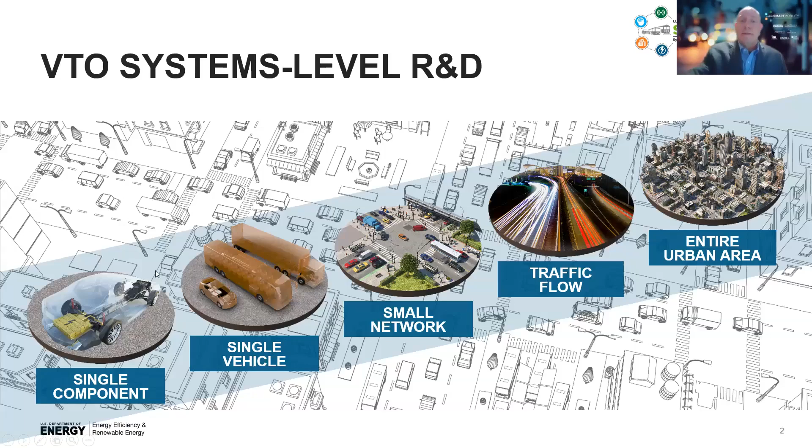As I've said before, because the opportunity space for transportation is so large and complex, we've taken a multidisciplinary consortium approach to mobility. We convened 5 of our leading national labs doing mobility research to build a multi-year, multi-laboratory collaborative dedicated to further understanding the energy implications and opportunities of advanced mobility solutions.

And we call this the Smart Mobility National Lab Consortium. This is really a key research effort of the EEMS program and is focused on understanding the system-level impacts that emerging transportation technologies and services will have on mobility, and on identifying solutions that improve mobility energy productivity.

The consortium was designed to consider transportation holistically, that is, as a system, a highly interactive, highly dependent, very complex system of systems. We did research to understand each of these systems individually, but more importantly, we worked to understand how they fit together, how they interact, and how they affect one another.

Connectivity refers to communication, an exchange of information between vehicles, that is V to V, or between vehicles and infrastructure, that is V to I. Connectivity can apply to both human-driven vehicles and automated vehicles.

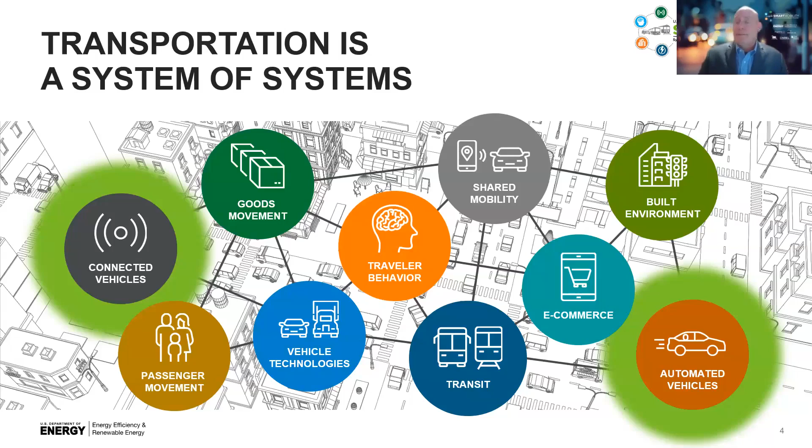CAVs are one of the primary technology levers that EEMS and Smart Mobility considers when looking at the future of transportation. And while nearly every new vehicle model sold in North America today currently has automated features as either standard or optional equipment, think adaptive cruise control or lane centering or automatic braking, we don't yet have fully automated vehicles ubiquitously driving everywhere on our streets.

So as new automated driving features are introduced, we have to understand how they operate, not only how they impact the vehicles equipped with them, but also how they affect the surrounding traffic. And that's what our CAVs research pillar set out to do, and what Eric will describe in just a moment.

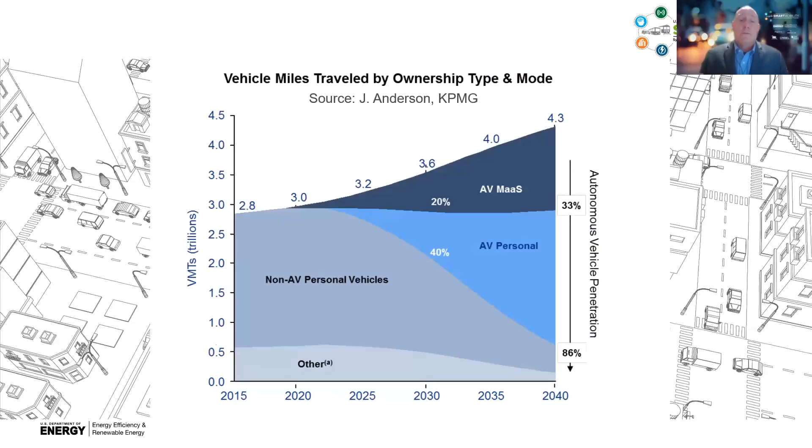This analysis of existing research at the time concluded that, in the worst case, we could see a 200% increase—that's a tripling of energy consumption from connected and automated vehicles. So that's the upper bound, estimated by looking at potential impacts in both the travel demand side and the vehicle energy efficiency side. The increase here is primarily driven by induced travel, that's an increase in VMT due to the ease and convenience of fully automated travel.

On the other hand, this analysis showed that if we use connectivity and automation to improve the efficiency of our transportation system, we could realize up to a 60% reduction in transportation energy, again, driven by both changes in efficiency and travel demand. The primary drivers here were shown to be opportunities to right-size vehicles and smooth drive cycles and operate more efficiently. So what this research told us was that there's a lot of uncertainty, and we saw a big gap in understanding the energy impact of CAVs.

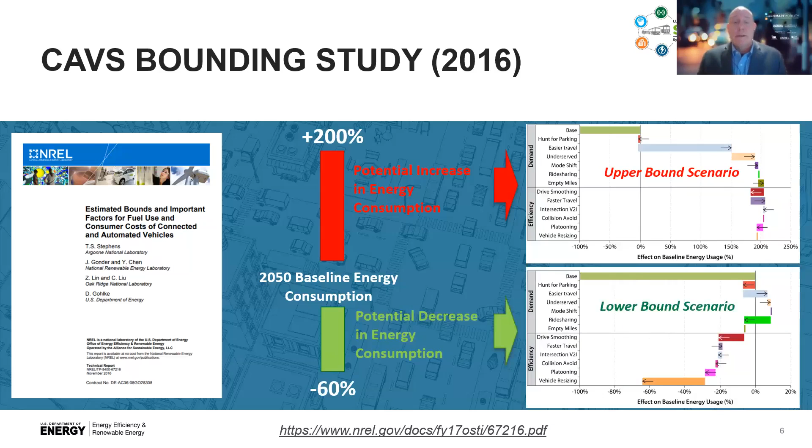So the answer to what are the energy impacts of CAV technologies came out to be, it depends. To elaborate on that, the impacts of connectivity and automation depend on a lot of things.

Levels of automation. So most of you are probably aware of the SAE automation levels, 0 through 5. The impact of any technology across the spectrum varies depending on what it is, how it's implemented, and how it's used. Types of connectivity. You can achieve very different results in terms of traffic flow and energy consumption depending on the information that is communicated to or by the vehicle.

Classes of vehicle. A particular automated feature can result in different energy impacts if it's on a compact car versus a full-size SUV or even a medium or heavy-duty truck. Similarly, whether the vehicle is powered by an internal combustion engine or a battery and electric machine or a combination of the two in a hybrid powertrain will determine the energy impact of the CAV technology.

What's the controls objective? Is the feature focused on safety, or driver comfort and convenience? Is it traffic flow, or is it fuel efficiency? Sometimes these objectives are in opposition to one another, but often they're synergistic.

Technology adoption. The impacts of 10% penetration of a particular CAV technology can be very different than if half the cars on the road are equipped with it, and the relationship is not always linear.

So now that I've teed up a lot of difficult questions, I'll turn it over to Eric Rask, who led the Smart Mobility CAVS research pillar at Argonne National Lab, to try and provide some answers. Eric will give some highlights of our CAV-focused research, explaining some of our findings and results. I believe we've made a lot of progress in this area over the past few years, but there's still a lot of work to do, not only by DOE, but by the entire research community. Once Eric is done, we'll have a few minutes for Q&A, and I encourage you to type your questions in the Q&A box, not the chat box, and we'll go through as many as time allows. So now I will turn it over to Eric Rask.

Hi everyone, thanks to David for introducing our topics. I'm looking forward to giving an overview of some of the highlighted research areas as well as the thinking behind what we did, building within the SMART Consortium as we're moving forward. Looking forward to the discussion.

Starting at the highest level, what kind of research questions are we thinking about? As David mentioned, we're really trying to understand energy, technology, and usage implications out of connectivity and automation, and also trying to think of efficient connectivity and automation-enabled solutions. The first part relates to VTO's technology portfolio and how we identify synergies, both positive and negative, with connectivity and automation relative to electric machines, batteries, and other technologies we're interested in. The second part is how we identify areas where connectivity and automation can be harnessed as an opportunity and enabler for improved energy efficiency, better traffic flow, less congestion, and other items VTO technologies are considering.

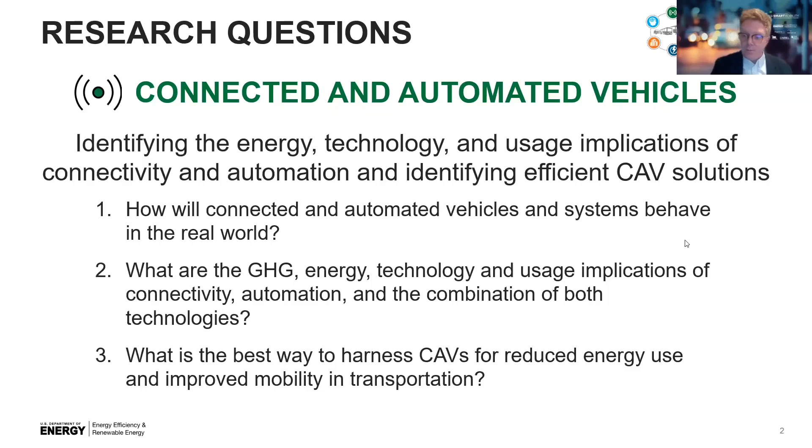Beginning with those three foundational research questions, we break that into research focus areas. The first is prototype development, experimentation, and large-scale data analysis. Thinking about our initial research question, how do these systems work in the real world, it's truly experimental prototyping and partnering with large data sets to understand how these vehicles are operating.

Moving into the second research focus area, we're interested in how we evolve and validate, particularly using data from focus area one, our connected and automated vehicle modeling portfolio. This is integrated within the Smart Mobility Modeling workflow presentations, and ultimately it's part of the larger effort of working from the vehicle level all the way to the system level.

Our third research question is understanding the impacts of connected and automated vehicles within the near-term transportation system—specifically what happens when different penetration levels of these vehicles show up on existing roadways and transportation systems, with some degree of vehicle-to-vehicle or vehicle-to-infrastructure communication, but not necessarily harnessing all the capabilities afforded to us. Building on that theme, the fourth question is CAV-enabled opportunities for reduced consumption and congestion, understanding what's possible from the range of these different technologies.

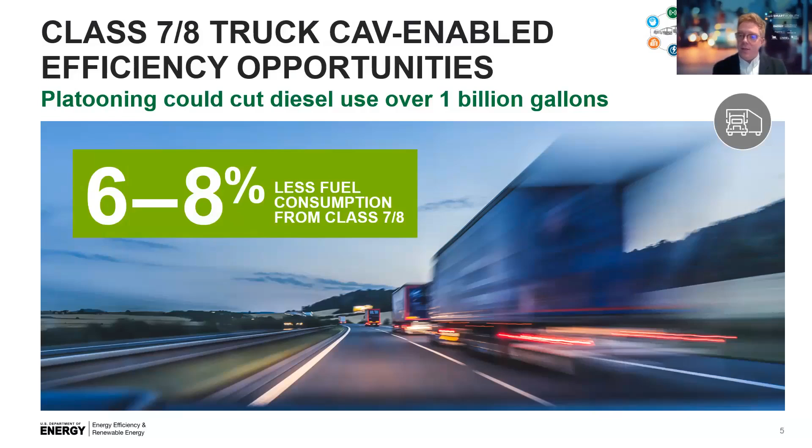Once we start thinking about how we get to those benefits, we break that into two separate pieces: one is the efficiency benefits available because of truck platooning, and the second is the opportunity to actually engage and observe those benefits through the availability of platooning. Stepping in one layer, the first part is a comprehensive study from the Department of Energy. These are some pictures from actual testing.

We did a lot of very detailed experimental work looking at different truck platoon configurations, different following distances, and that's how we get the first piece of this number in terms of 7 to 13% savings, depending on how many trucks are in the platoon, what the configuration is, and what type of speed they're operating at.

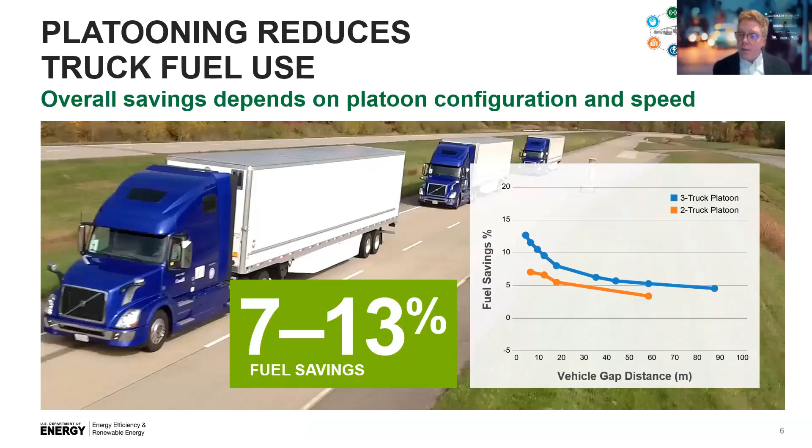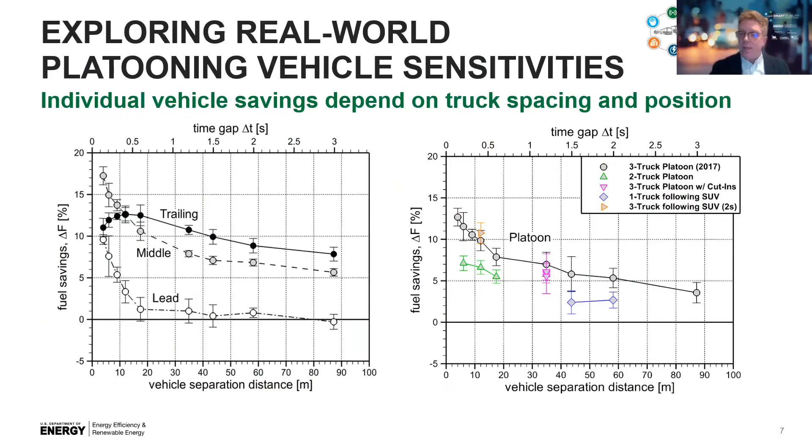While I'm not going to talk much about that here, a lot of really interesting aerodynamic work was done, both in terms of instrumentation and data analysis, to understand these interesting and not necessarily expected trends for the trailing vehicle reduction as it gets closer to the other vehicles. The figure on the right highlights the comprehensive nature of this analysis. Not only did we look at 2 and 3 truck platoons, we looked at platoons that may or may not be following an SUV, and vehicles cutting in and out of the platoon. So really trying to understand not only the pure benefits of platooning operation, but also the real-world sensitivities and operating conditions that may impact the overall benefit.

Again, we talked about the benefits of platooning, and now we're talking about the opportunities for platooning. This was really a set of studies to understand what type of platooning capabilities and opportunities exist at a national level. In this study, we worked with about 57,000 vehicles provided by Volvo as a data partner. We started to look at how often these vehicles were driving over 50 miles an hour, so seeing a platooning benefit.

Similarly, we wanted to identify locations and trucks that had platoon formation capability, defined in this study as about a 15-mile radius of truck to truck, as well as a 15-minute window of travel time. This is really understanding how close and available these trucks are to form platoons that can then drive on long interstate pieces. Circling to the top conclusion, we see about a 60% opportunity for platoonable miles. Combining those two numbers together, that's how we get the 6 to 8% overall benefit in terms of opportunity to platoon as well as the benefits of platooning itself. Really interesting study, a lot more detail available, but these are some of the high-level conclusions.

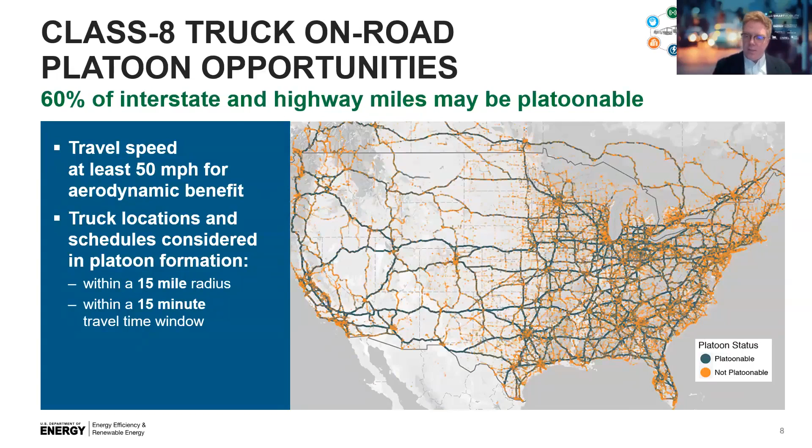Next up, another experimental question. David talked about automation and really trying to understand the functionality and electrical loads associated with connectivity and automation. Starting from some of the early field trials, we saw a lot of vehicles with very high electrical loads associated with automation and the compute required for some of these operations—something like maybe 2,000 watts required for driverless capability.

So being able to do all of the sensing, awareness, and operations to be a fully driverless vehicle. The second part we wanted to understand is what the spectrum of capabilities looks like, because we're interested not only in fully driverless capability, but in automation as an enabler across the spectrum of capability. So we wanted to understand things like highway cruising, eco approach and signal departure, highway lane changes, and low-speed repositioning and operation.

Field studies here make us pretty confident that we're talking a much lower number, maybe 400 watts for automated eco-driving. In the next slide, we'll see other operations that are even lower.

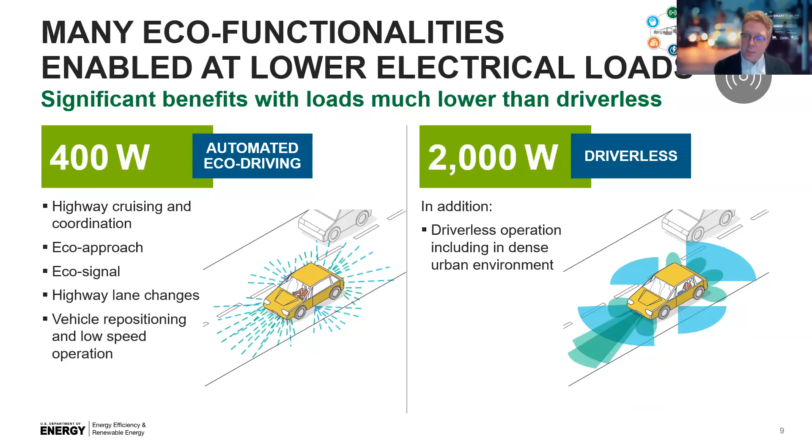Going one layer deeper, how did we start understanding and implementing this? We really tried to get a snapshot of current technologies. On the left side, we worked with a Cadillac Super Cruise, which has lane following and hands-free driving capability on highways. We saw about 100 watts of automation load here. So again, we're thinking 100 watts versus 2,000 watts — a very different amount of energy required for some of these simpler functionalities compared to those we're interested in from an eco-driving approach.

Similarly, we partnered with FEV on a smart demonstrator vehicle that afforded highway, hands-free, as well as some attention-free driving. It also did low-speed, fully driverless operation. We ended up seeing about 380 watts for this vehicle, really understanding again that it's an important spectrum of capability, and being able to match where you need the power and the processing.

Really putting a flag in some of these new capabilities, I want to highlight that automation loads are evolving quickly. There's a lot of balance in these numbers — we're trying to balance safety, additional functionality like higher resolution cameras or additional sensors, and processing improvements. Machine learning in general, and the whole connected and automated vehicle stack, is dramatically increasing processing capabilities and raising energy consumption questions. Tracking this is the first level of understanding about these different spectrums, but it's helpful to have this test data to start thinking about the wider spectrum of operational envelopes.

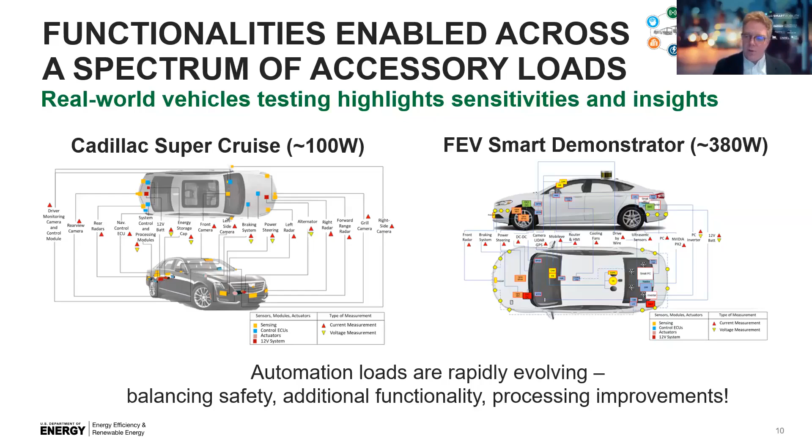Moving on to the second piece — a lot of detail on this was covered in the Smart Mobility Modeling workflow presentation, but I want to highlight some pieces that the connected and automated vehicle pillar talked about as well.

We're looking at single component operation from the ADAS or automation systems we talked about, then individual vehicles, then networks of vehicles and traffic flow. As we get data from different automated vehicles in the field, we can update these models and understand how they flow from the vehicle level and the component level. This integrates within the much larger workflow highlighted in Emmerich's previous presentation.

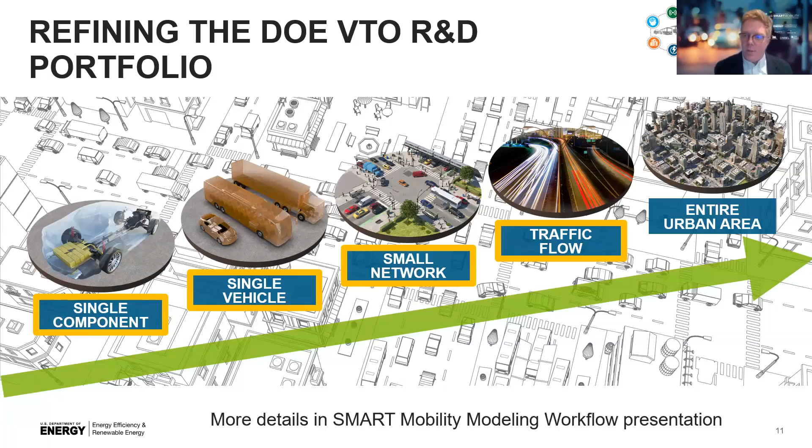One example I wanted to talk about, in terms of the evolving simulation portfolio, is RoadRunner, which provides a trip-level simulation of both powertrain and driving dynamics for energy-focused CAV controls development and evaluation.

If you think about connectivity and automation, not only do we have awareness about the vehicle's current and future operating conditions and states, we also have the ability to change the vehicle's trajectory itself. Vehicles can interact with each other, speed up and slow down, and be aware of future and current operating conditions. So there are a lot more levers of optimization and control flexibility to get these CAV-enabled controls benefits, which of course requires an evolving workflow.

In terms of the overall workflow shown here, it's really interesting to start using real data-driven drive cycles and maps — not only moving toward the location, but dynamically understanding how vehicles will drive during their actual position in these drive cycles. Similarly, we want to understand connectivity from traffic signals, and look at different vehicles.

We want to understand classes and then build upon the powertrain simulation capabilities that DOE is very strong with. We want to understand levels of connectivity, controls, and all of these pieces integrated and working together in a coordinated workflow. Of course, we want to automate this, do post-processing, and get into analysis of the results. This is the evolving portfolio as an example, but the CAV pillar also did work for microsimulation as well as regional modeling capabilities, understanding how these vehicles work from a data-driven perspective and building that into the modeling workflow.

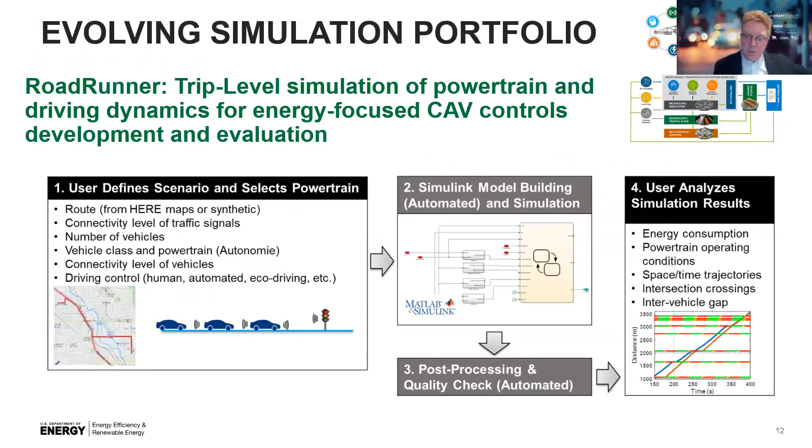Now we're moving on to research questions 3 and 4, the different focus areas. This is a suite of 3 examples that show the interesting and different types of analysis you can do at the individual vehicle level, as well as at the system level, and then really harnessing connectivity.

The first example is in collaboration with the Volvo Drive Me field trial work done in Sweden. We looked at ACC, adaptive cruise control vehicles operating within their specific region. We saw a fuel consumption decrease of about 5 to 7% for these vehicles at an individual vehicle level. So it's a promising technology.

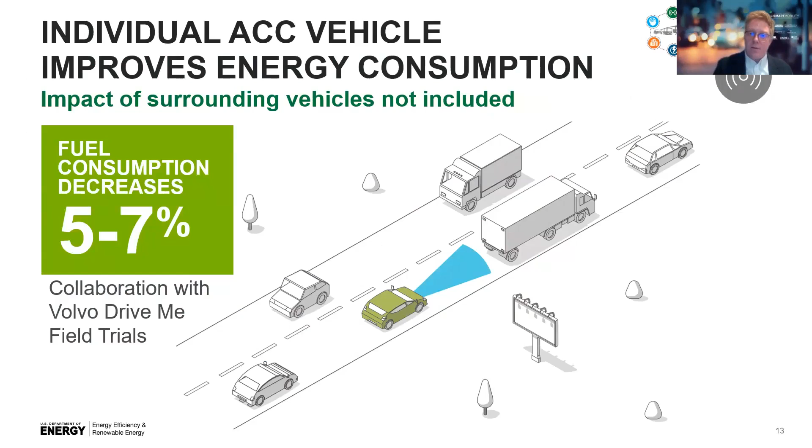But if we then look at micro-simulation based studies at high penetration levels of adaptive cruise control, we see negative impacts on traffic. Lack of communication and delays induced by the adaptive cruise control systems lead to traffic instabilities and congestion. In our micro-simulation study, we actually see a fuel consumption increase of about 60%. That helps identify the dynamics between individual vehicle benefits and system or multiple vehicles working together benefits.

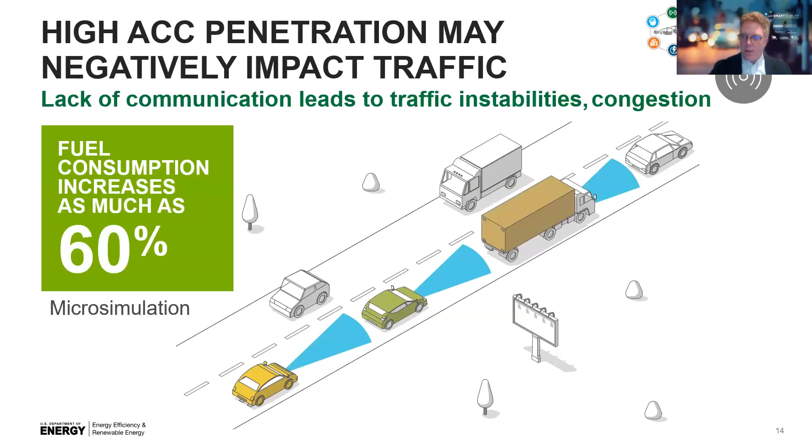Ultimately, we talk about a collaborative, cooperative solution to some of these issues. With cooperative adaptive cruise control, vehicles can talk together, coordinate, and understand surrounding conditions, and we see lower energy use. Not only are we combining communication, we're also fusing automation with communication, so we can look at up to a 20% fuel consumption benefit. That's looking at communication and refined controls.

It's really interesting that individual vehicles benefit from just this adaptive cruise control, but as we drop that into a system of vehicles, we see dramatically increased fuel consumption. Then if we start harnessing the controls and communication capabilities afforded to these vehicles, we can start getting benefits again from different strategies and operational conditions.

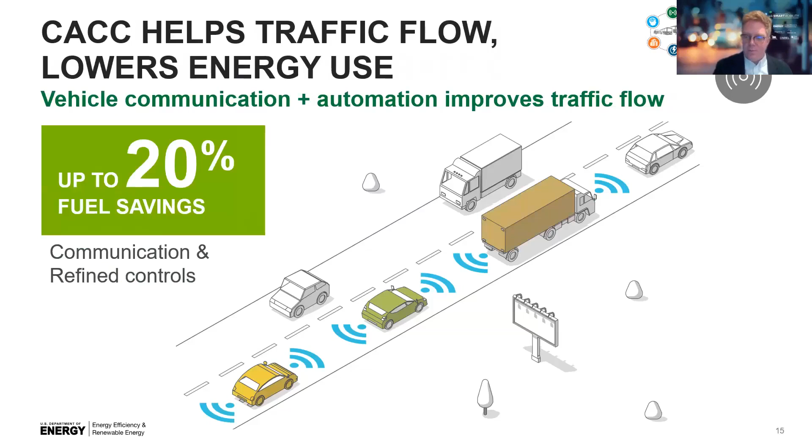Similarly, we also have a lot of operational controls about both vehicle and powertrain controls. One of the major keynote findings was being able to adapt to conditions, other vehicles, and traffic lights by not only changing the vehicle trajectory itself, but also the powertrain controls, which is a very effective strategy. We see up to a 20% increase in individual fuel consumption reduction for some of these technologies.

But then we start to see variability across different driving styles, just like David mentioned in the introduction. We see differences in driving conditions, and differences in the relative impacts of automation and connectivity. It's really about understanding the full space of these different technologies and their impacts across different facets of vehicle technologies, but also understanding what's possible at the high level.

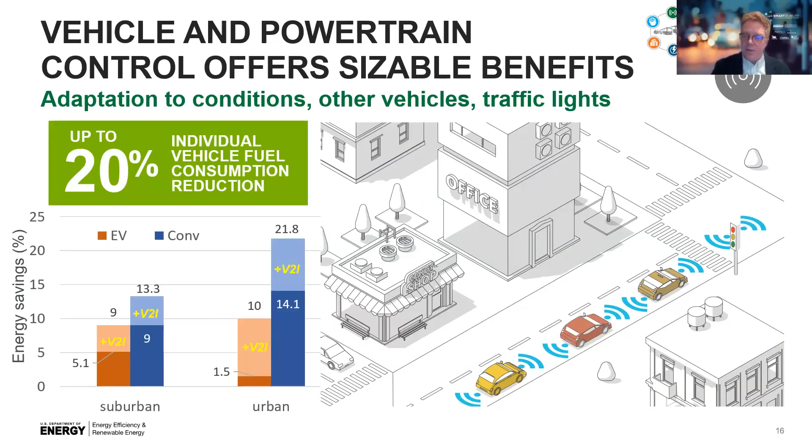Peeling one more layer down, I want to highlight this was a really comprehensive, very large-scale study of real-world implementable controls. We're talking about a large-scale simulation study - over 4,000 simulations were actually run.

We started looking into things like powertrain type and technology scenario, because the controls and benefits afforded to conventional vehicles, electric vehicles, and hybrid vehicles, as well as how technology changes impact the value and benefit proposition of connectivity and automation, is really important to understand for future studies and technology portfolio planning.

So it's really understanding the difficulty and the advantages of adding speed and powertrain control versus just speed-only control. Relatedly, we can also talk about different scenarios of infrastructure to vehicle communication, as well as different scenarios: what happens when you're leading a vehicle, or what happens if you're following a vehicle? It's really interesting in terms of how the benefits of one optimal vehicle may or may not filter through into the rest of the vehicles operating in its nearby surrounding area.

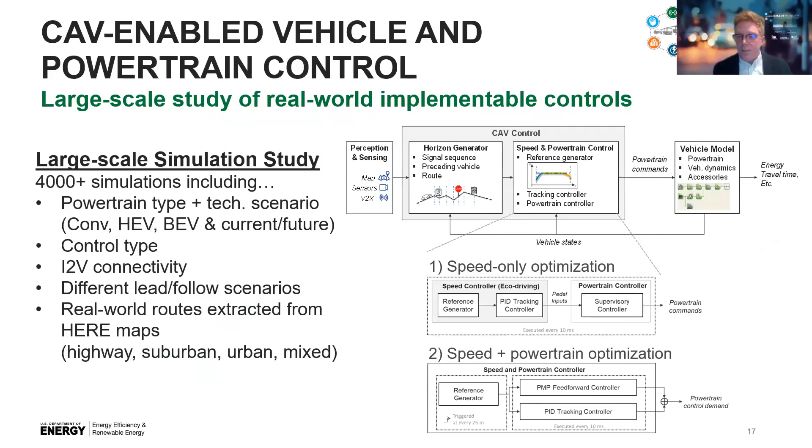Not only do we see benefits and interesting sensitivities at the vehicle level, I really wanted to highlight that the optimal control case also impacts component usage and efficiency. So when we delve into these questions, there are a lot of important and interesting dynamics, both from the connectivity and automation perspective, but also in terms of DOE's overall portfolio of technologies. If connectivity and automation change the emphasis or importance of certain technologies, we want to be aware of how that evolves the portfolio in parallel with all these ongoing connectivity and automation benefits.

Relatedly, just like we talked about for the gear shifting, we see much higher motor efficiencies as well for these baseline versus optimal cases. So we're seeing dramatically improved operational conditions at the component level as well as the overall vehicle level. So it's really important to identify, are we using certain components more or less in a connected and automated future? And how are we pushing the envelope of where we're using those conditions?

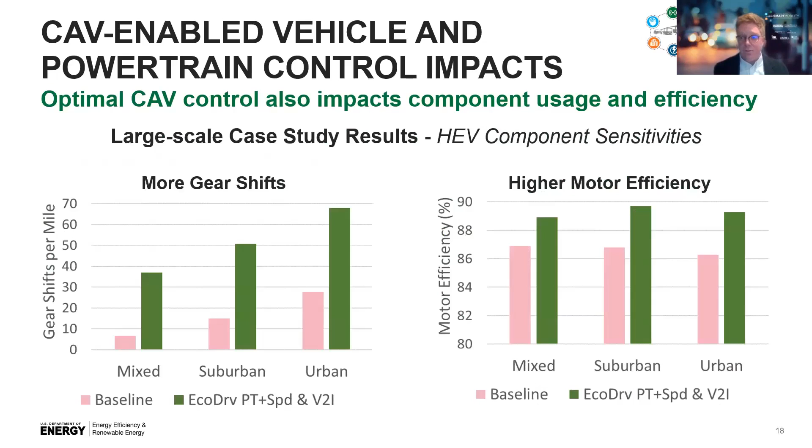Now we're moving to a more complicated scenario where we're looking at merging. So we have optimally controlled vehicles that are now merging into traffic of various penetrations. This is a really interesting study, again highlighting some of the questions that David mentioned earlier. What are the sensitivities to penetration level? What are the sensitivities to traffic conditions? And how do these vehicles integrate themselves into the overall flow of traffic?

This is a study that actually looked at a 7-mile corridor on I-75 in Tennessee. We saw at 20% penetration of connected and automated vehicles about a 4% reduction in overall fuel consumption. At 100% penetration, we saw about a 7% reduction in overall fuel consumption. There are a lot of interesting sensitivities and insights from the study, one of which is that even at low penetrations, we still see appreciable benefits for automation and connectivity. This is really promising in the sense that we see benefits all the way through an adoption trajectory. We don't just see the benefits at 100% penetration.

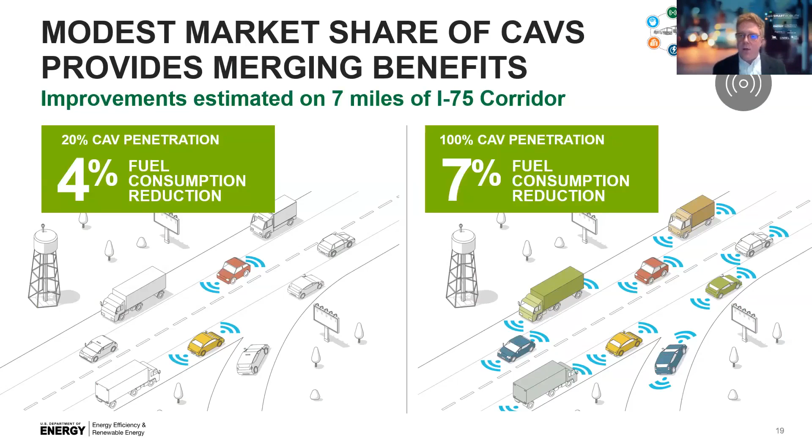Similarly, again, 7% — we look at overall benefits for CAV penetration. Delving one layer a little deeper here, we started with an optimal coordination framework that looks to minimize the overall tractive effort for the area under study. Then, in a traditional optimization approach, we're looking at vehicle dynamics, boundary conditions, and safety constraints in terms of the vehicles not encroaching and not running into each other. We then build that into the control zone and the merging zone.

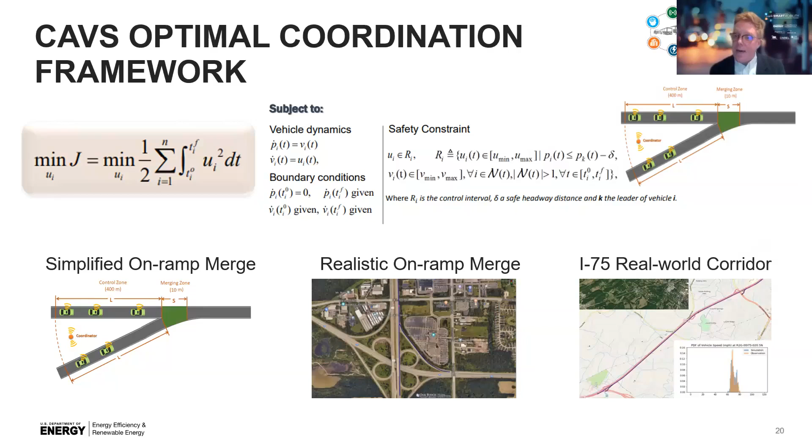So again, just to quickly summarize, there are a lot of really exciting results, a lot of really interesting insights at the very high level, and taking that all the way to the very low technical level in terms of detailed insights about different technologies and different control strategies.

To quickly summarize again, from the experimental side, we see a 7 to 13% benefit for truck platooning, and that was done by a very comprehensive set of work and experimental testing with real prototype vehicles and very intensive instrumentation. Similarly, we see accessory loads about 400 watts or even lower from existing vehicles, both a prototype vehicle and an in-production vehicle, so lots of interesting observations about the functionality and loads those vehicles are seeing.

Then moving over to the controls and automation side, we see about a 15 to 20% fuel savings benefit from cooperative adaptive cruise control. So remember, individual vehicle benefits may not necessarily translate to overall benefits, but cooperation through automation and connectivity is really important for some of these benefits.

Relatedly, if we start combining vehicle and powertrain controls, we see up to a 20% benefit in fuel consumption reduction, really understanding all the levers and capabilities that connected and automated vehicles entail. And then, of course, coordinated merging that we just talked about, we're seeing a 4 to 7% benefit in fuel savings. This changes depending on scenario and penetration, but really enabling overall congestion and consumption reduction through connectivity and intelligent use of connectivity.

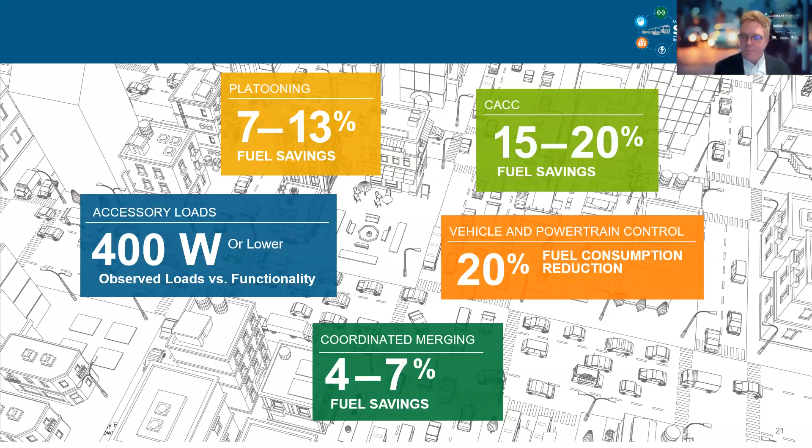With that, I really want to highlight this was just a very quick brush through a lot of the thinking and approaches that came from this vehicle, the CAV focus area, principal investigators, and contributors. I'm just explaining some of the work and thinking that went into it. It was a very diverse and broad-ranging set of researchers, capabilities, and labs brought together for really exciting and groundbreaking work in connectivity and automation.

So with that, I'll hand it back over to David, and we'll talk a little more for questions and open up for discussion. I really want to highlight this is a very high-level overview of some of the thinking and high-level conclusions, so please refer to the capstone reports and the website for these seminars to get a much deeper understanding of some of the issues, questions, and really exciting insights that came from this work. So thanks to everyone for their understanding and listening, and I'll open up to some questions.

All right, thank you very much, Eric. Great summary of a lot of work that, if we dove into all of it, would take a day or many days to fully cover.